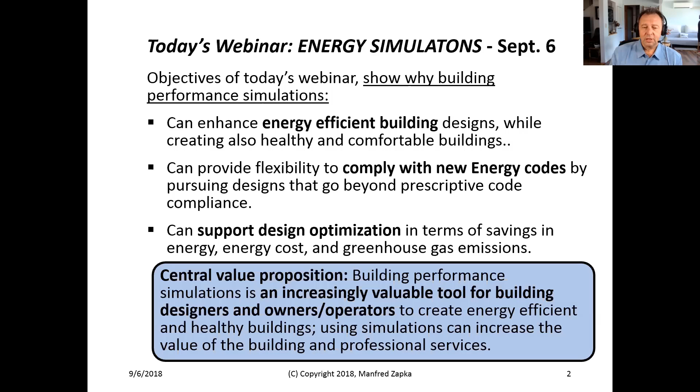Here in Hawaii, we have the IECC 2015, and this offers simulation as a pathway for compliance, and it affords the designer some kind of flexibility. So the overall central value proposition which we are going to show here is that building performance simulation is an increasingly valuable tool for building designers and operators, to create the energy efficient and healthy building which we use.

Let's see, I would just like to share my story of simulation, how I got into it. It was about over 20 years ago, where I started 3D animation simulation for plant design. This developed in a sense that I got very excited, and I was very excited lately working with ERDL and University of Hawaii on new kinds of application of this evolving field.

And the beauty in the simulation is that we can investigate alternatives of building design. We can optimize it even before we put any kind of money into constructing it. You will be seeing that the recent work of ERDL and university has used simulation to study various building design performance aspects, and energy performance will be one of the highlights here of our presentation.

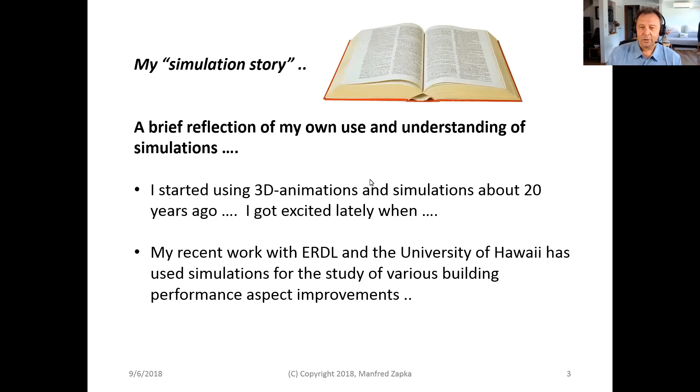Let's take a step back, because for people who have never done it, I hope that in the future this will help the local building industry get more accustomed to simulation. When you step back, simulation is not really foreign or new on the horizon—it can be found in virtually every sector of the industry. Here I will go through some examples.

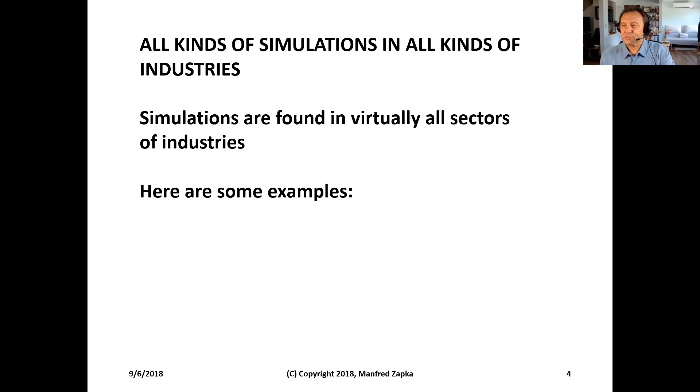On the left side, you see making cars more aerodynamic, reducing resistance to make them more energy efficient. You see training pilots without leaving the ground. This kind of simulation sometimes uses supercomputers—you need really heavy computing power.

We also see architectural rendering. Almost everybody knows this right now—it's common knowledge. But 20 years ago when I started, it was like, wow, you have something photorealistic you can put into a neighborhood. So this is also a kind of simulation, but much more visualizing.

Floodplain simulation is increasingly important right now. We see the effects of global warming and climate change causing different rain events, so we can predict where is actually a good place to put a house, or what things we have to mitigate in order to avoid flooding problems in the future—so we are better informed.

Next is airflow simulation. We have done that too—I'll show you afterwards, at the University of Hawaii, specifically around high-risers, where it has effects on the building itself or on pedestrian comfort and safety.

To the right of it, virtual reality application seems to be more the future, but it's increasingly used also for energy and building design, and we'll be looking out for this. So it's not totally in the future—we might be there pretty soon.

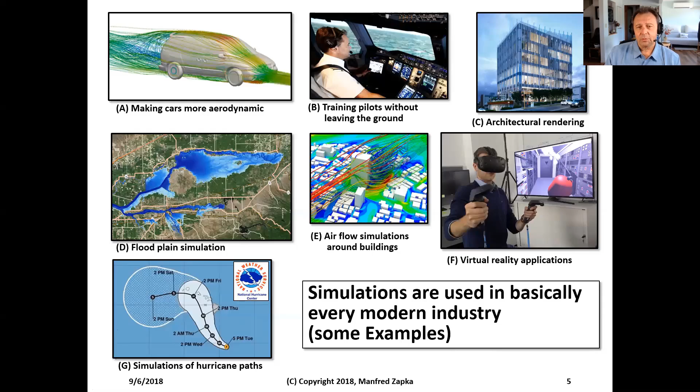So here are some important issues to keep in mind for simulation. We always have to remember that simulations are abstractions of the real world. A lot of times people get carried away and say whatever we get out of the simulation is the truth—but it's not.

We can make the simulation more or less complex with more comprehensive calculations, but in the end there is always simplification. Usually we only model specific performance behaviors, because our mathematical algorithm is pointing to a specific behavior of the system. So the numbers we create are only valid for that very specific conclusion, and simulation need not be complicated if we define the application very concisely.

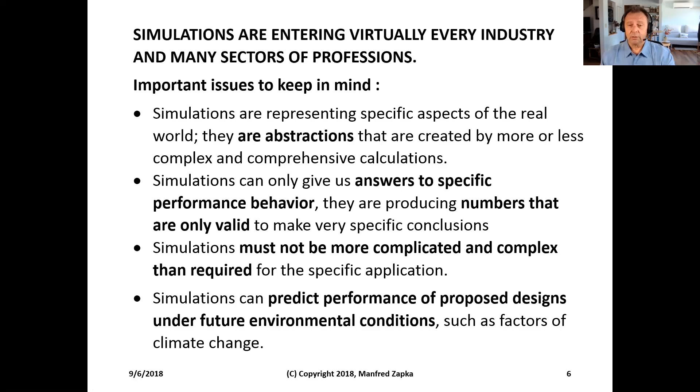One other thing I want to point out: simulation can predict the performance of proposed designs under future environmental conditions—for instance, climate change. We might have to model how buildings will perform in the future when it's getting hotter, when it's getting humid, or if there are big rain events, whether the floodplain is still okay and safe. So these are things we should keep in mind right away.

And we have many types of building performance simulations. [Sorry, I've got a little cold today.]

Starting on the left side, we have indoor comfort of a building. We have particles and pollutants, where we can simulate the spread inside and whether or not it is an issue for health. We can simulate sound by attaching certain material properties to surfaces and sound sources. And very important right now is moisture—in the air and in different building components. This is getting a lot of attention, since more energy efficient buildings are having moisture problems which are not getting smaller.

We can simulate airflow around and inside buildings, which we have done with HNEI here, and we can simulate lighting and daylighting in the sense of how daylighting can replace artificial lighting, which of course also creates a need for energy.

We can simulate thermal comfort, and right now we have energy, which we'll be concentrating on. Simulation is synonymous with modeling, so modeling or simulation is basically the same. What we create is an abstraction of the nature of the real world, and we package it in a way that we can calculate.

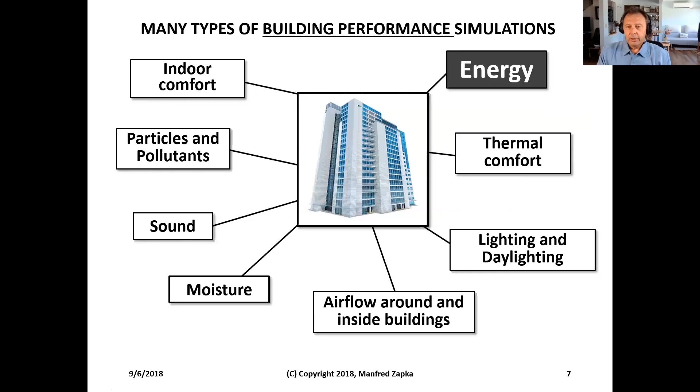Building performance simulation has a surprisingly broad range of existing and future applications. This is a very nice and exciting tool, and we hope our contribution here in Hawaii will help the industry embrace simulation in a better way.

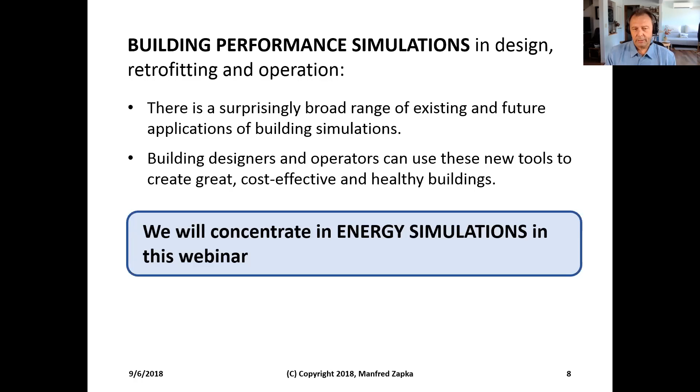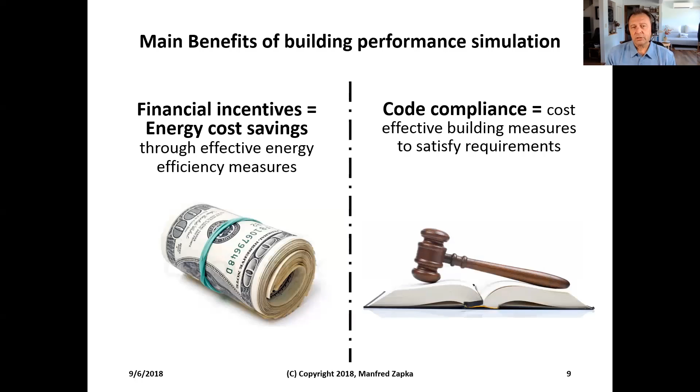The main benefits of building performance simulation, speaking about the energy part, are twofold: one is financial incentives, where we can save energy costs, and the other one is code compliance.

Looking at the financial incentives of energy simulations, the more energy cost we can save through identified or optimized alternatives through simulation, the more energy costs go down. We can try out multiple alternatives, tweaking the building here and there, until we reach the point of the most effective or biggest energy cost savings.

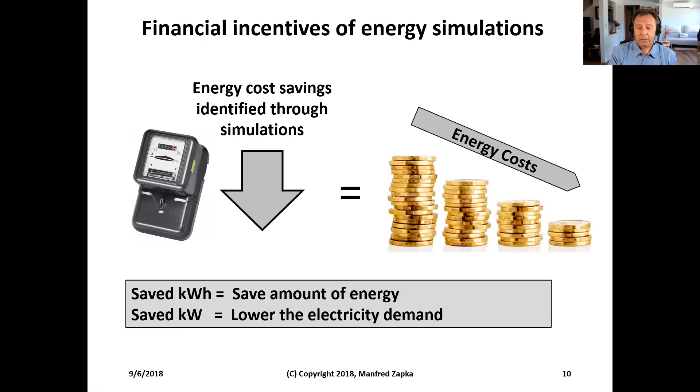The savings is measured in kilowatt hours, which is the energy, but we can also identify what kind of power we are using, in kilowatts. This is very important because we not only have problems providing energy and need to save, but we also need to save on peak energy demand.

Whenever we want to save energy, it requires investment and emphasis on energy efficiency measures. So starting from a simple, basic house design, we have to put money in to save energy, to get to a more green or energy efficient house. You cannot get anything for free, right? You have to pay in order to save.

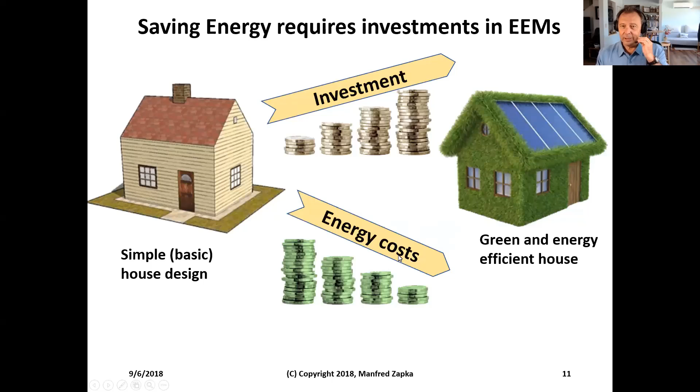I apologize, I have a little cough today. So if we look at what the energy efficient measures are here in a building, these are just some examples.

We can invest in roofs, or cool roofs as we call them. Here we configure the roofs so that the least amount of heat is absorbed by the building. It should just reflect the heat, and it should be able to emit heat, so it should stay cool. The term says it all - it's a cool roof, not cool because it's cool, but cool because it doesn't take in so much heat.

Wall insulation is similar, because here in Hawaii it's usually hot outside, and we would like to avoid heat penetrating to the inside. Wall insulation helps keep the heat out through the walls. What it does is not only cool down the inside walls, but if the inside walls are cooler, we don't have so much radiant heat - and that's what we feel when we get close to a hot object.

On the left side here, PV - an energy efficient measure not necessarily to save energy, but to create or generate energy onsite. This is one of the most amazing things we can use with a building, that we can create energy. We use the roof to cut down on energy demand, and we can create and offer some of the energy for use on site, so we don't have to take it off the grid.

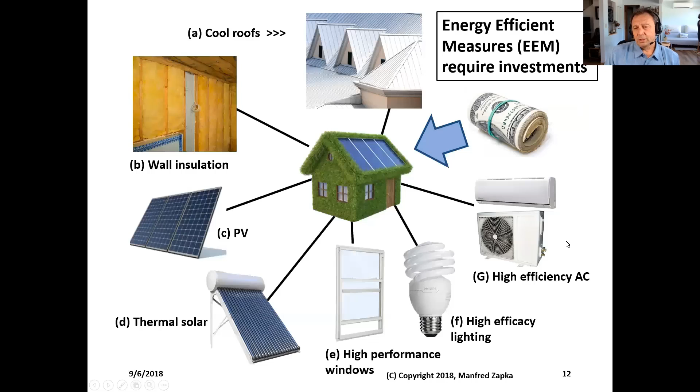Remember, we said we have to pay dollars in order to save energy. It's usually true that the most energy efficient and best equipment also costs money. So these are all examples of how we have to invest into issues so that we can actually save energy.

So the next question is, how do we assess the ROI of energy conservation? Right now we have simulated a couple of alternatives which save energy, and we have to see how much we have to invest in order to realize the energy savings.

We have two ways to identify this: simple payback and net present value. We won't go into net present value right now, but these are the two things. You have an initial investment, and due to energy savings you regain this investment, and afterwards you're cash positive. Simple payback should be used for shorter term return on investment, and the longer and larger the investment, you should use something like net present value. Again, we won't go into the details, but please keep this in mind.

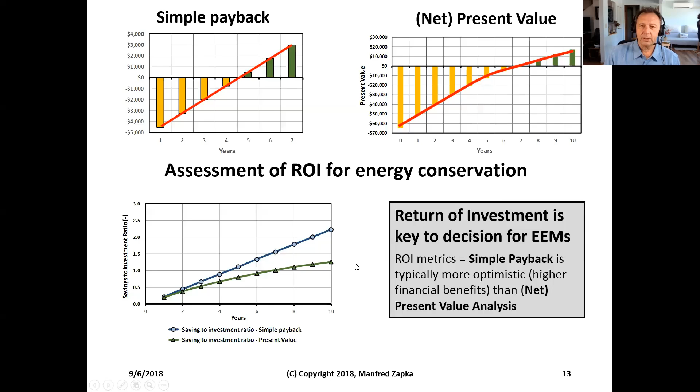Rule of thumb is that simple payback is almost always more optimistic than net present value. So when we decide on the financial performance, we always have to consider both: how much energy we can save, and how much investment is needed to realize those energy savings.

Building performance simulation is a very effective assessment tool. It's a very effective and good way to identify the most effective approach—just try out all these alternatives and see what is best in terms of the finances.

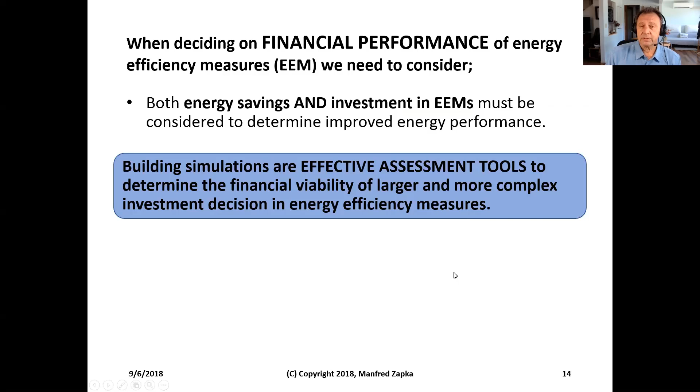There are also other benefits—we can comply with compliance standards, codes, and building standards like LEED. For instance, we get points if simulations show good energy efficiency, or as I said, the International Energy Conservation Code, which is to be adopted in Hawaii, offers compliance through simulation.

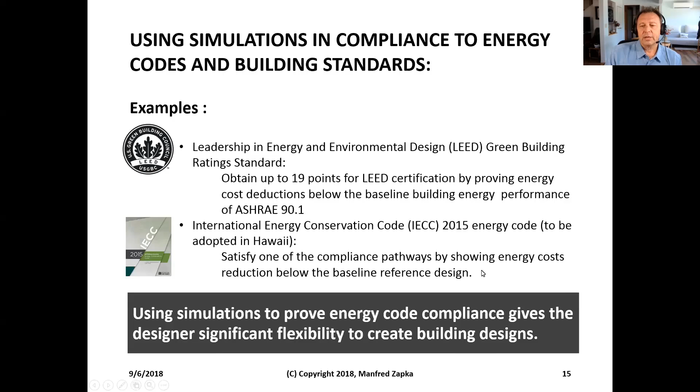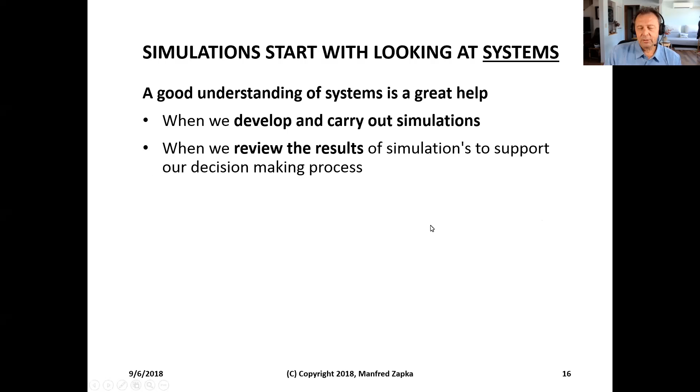Simulation always starts with systems, and a system is an abstraction of the real world. It's important to see both how you create the simulation and how you see the results. The modeling and simulation of a system is a calculation method using mathematical models to predict the performance of a system.

You have the real thing here, and there's some kind of mathematical algorithm that defines a prediction. The nice thing is we don't really have to know all the mathematical algorithms in order to use the simulation.

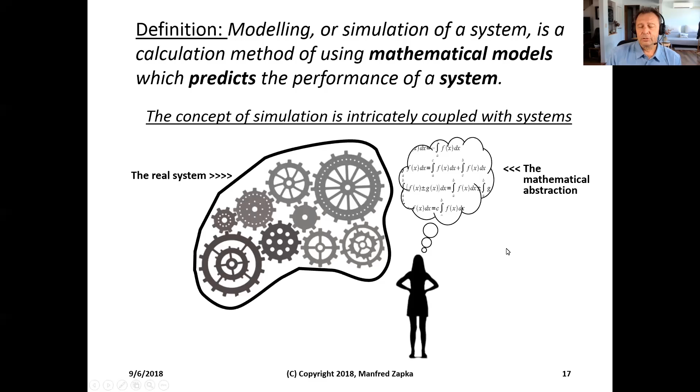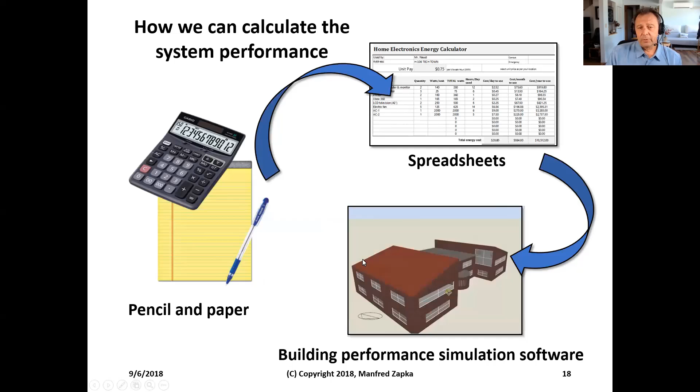How can we calculate the system performance, how can we quantify it? We can do it with pencil and paper when it's very simple, or with a spreadsheet, but the best would be some kind of building performance simulation software. That's actually what we're doing right now at ERDL, and what we'd like to do in future to also help the local building industry get more into.

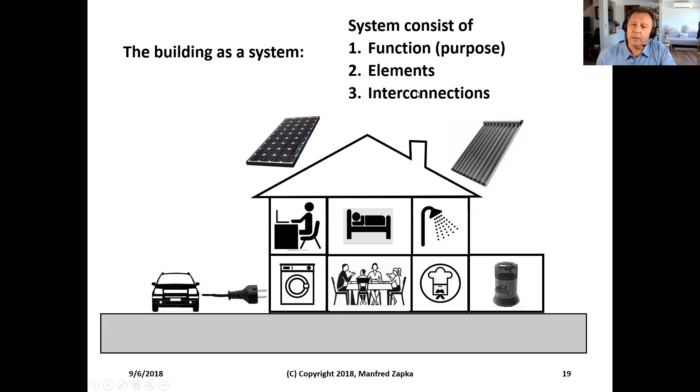Briefly, a system has three elements: function, elements, and interconnection. This is the house, and the function of the house is to provide healthy, safe, and cost-effective shelter and an uplifting place to live. We should always keep in mind that even if you make it very energy efficient, in the end the value of the house is that it is healthy, safe, and cost-effective.

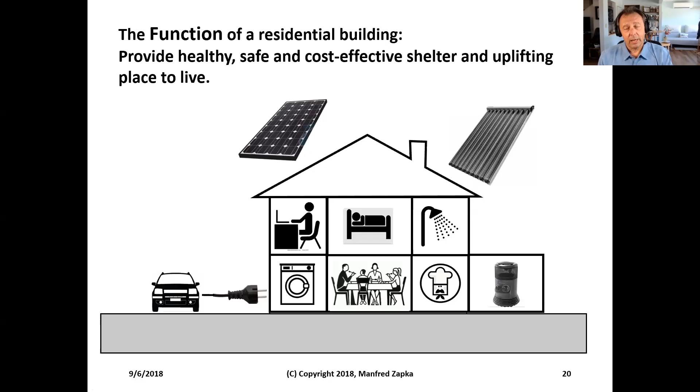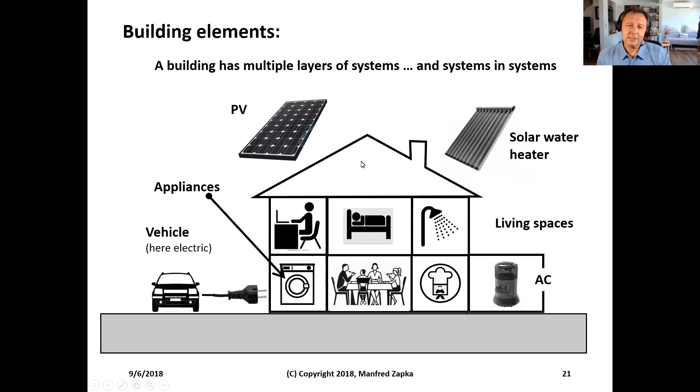A building has all kinds of elements: internal rooms, appliances. Here we have an electric vehicle, we have AC which is cooling the building, and different kinds of renewables. So these are all different systems, and we also have systems within systems.

The beauty is that in our energy model, we take it such that there is something like a boundary, and we can identify the quantitative measure of the system just by drawing a boundary around it. We don't necessarily have to know everything which goes on inside this system.

So what is the system here? For instance, an interconnect - where are the boundaries? The boundaries would be the red. The interconnection is that it has to get some kind of electricity, and the outside of the system is the grid. The inside is all the different components.

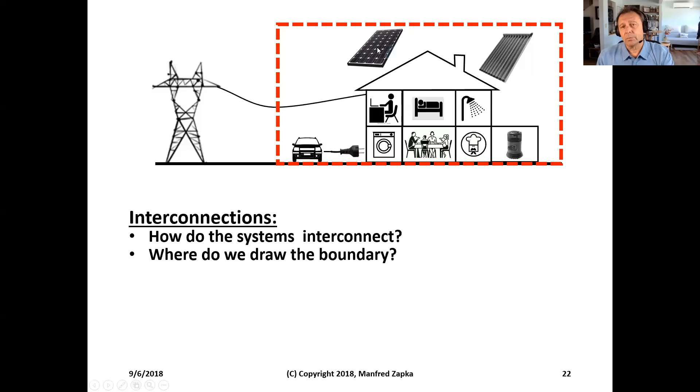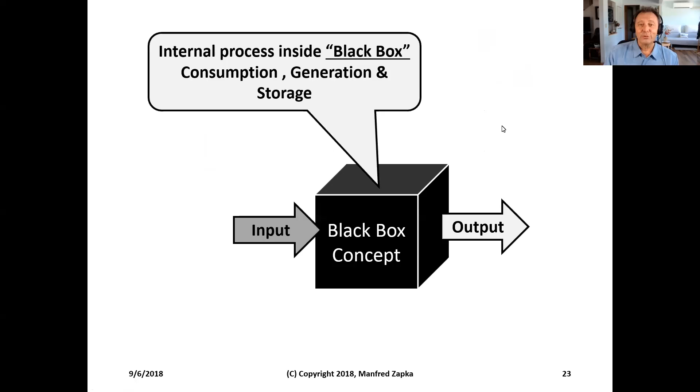Whereas here, for instance, the PV can even give electricity to us. So a lot of times we have like a black box, and this is fine - we can define the quantitative performance of the black box. We have an input, we have an output, and there's something going on inside that black box: consumption, generation, and storage.

Either we can total it all up and say this is actually whatever we consume inside, or we can identify different components of the system - what actually is what we are consuming here. And if we have surplus electric energy, we can also export some electricity to the grid. This will help us identify what is coming out of the simulation. We don't necessarily have to know all the intricacies inside of this thing.

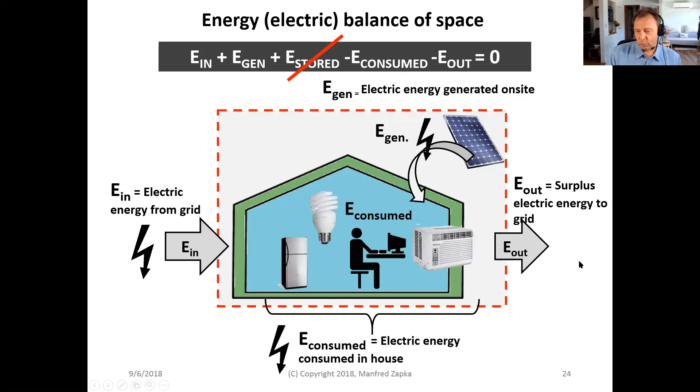We just say it's convenient - we have a boundary, what goes in, what goes out, what is consumed or generated inside. Our home, for instance, is very net energy - we create a lot of energy here at our home. So we would actually export electricity.

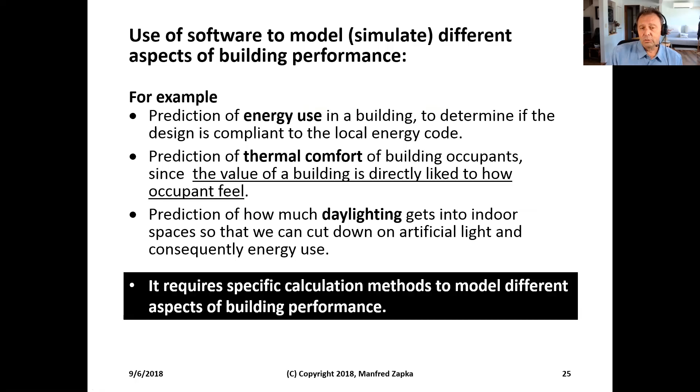So the use of software has different aspects - what I said, we have energy, we have thermal comfort, we have daylighting. There are different ways we can use to identify the performance, and all of them are important if we want to make sure that our system, which has a certain function, as we saw like the system of a house, creates a comfortable, energy efficient, or cost efficient way to be. It has to serve this purpose.

So if you compare building simulation with actual measurements, which is often done - we simulated one side, but at one point we also would like to know how does it compare to the actual reality. A lot of times we are surprised - hey, this thing does not exactly come out as the real world. We should always keep in mind that simulations are abstractions of the real world.

It's also important to see how much complexity our simulation has. You can use maybe very complex simulations - at ERDL, we took some simulations that ran a couple of days, but we could have something which is done in a minute. It's pau, or it's done - pau is what we say here in Hawaii.

But the power of the simulation is not necessarily only how it compares to the real world measurements, but how is the relative performance - we have a benchmark which we simulate, and then we have the different alternatives. It should really help us as designers to plan, and we should not shy away - we should embrace simulation more and more.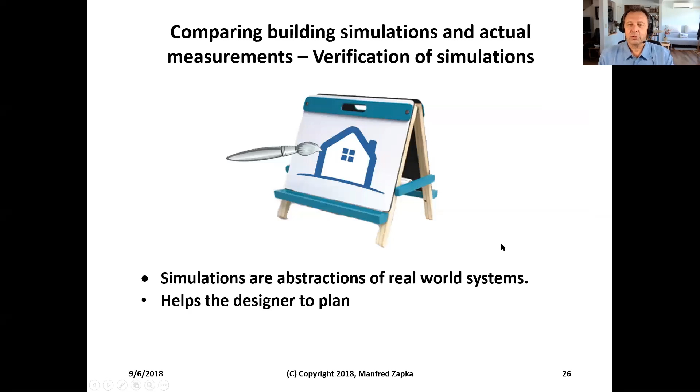Here are just some examples of what we would measure. Sometimes it makes a lot of sense to measure - we have electricity, and some other things we can measure: the temperature inside the building, humidity, air movement.

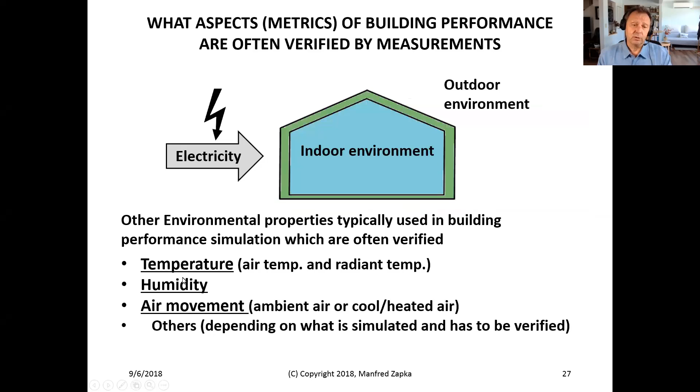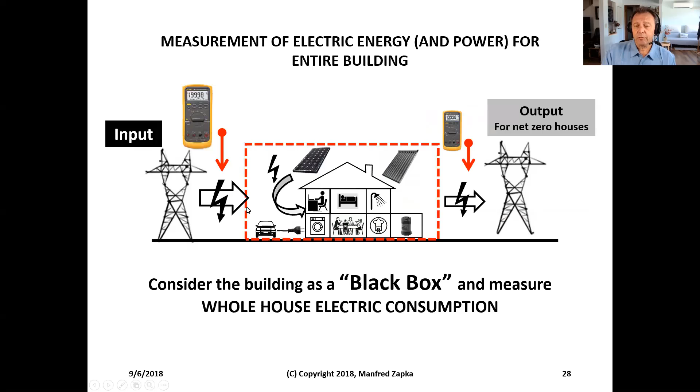What we can see here is a different way of getting to it. It's like the energy we would have, the big black box where we call the whole house electric consumption. Basically here we say, what does the whole house, the whole building actually consume? We have an input we can measure, and if we have PV we can also measure the output. But if we don't have PV, this would be our biggest result: how much energy is used for this entire building, using the black box model for the entire building.

The next one would be if we want to measure the electricity used by, or generated in terms of PV, for the different elements of the building. Here you see it could be the large appliances, the plug loads, how much the HVAC consumes for the building, and domestic hot water - how much we put in electricity to power all the pumps, but how much we actually save in order to heat up the water. How much do we have for lighting?

So here it's much more that we can go in there and see how our simulated results compare to the actual measurements. So we get a good idea where it's maybe a little bit shy. It doesn't really say that the simulation isn't doing well, but we should keep in mind there's certain abstraction to it and simplification. And the simplification makes a lot of sense if we actually know what kind of simplification we need or are using.

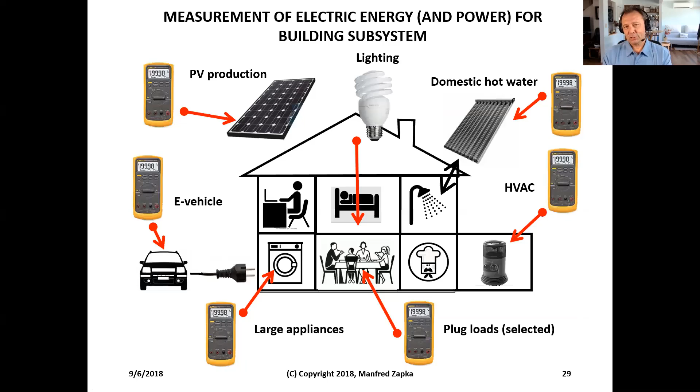So the measurements, again, like we said - sorry, let me give you a short example. What we also at ERDL do a lot of times is go in and measure.

We have the relative humidity, and we have a globe thermometer. A globe thermometer measures the mean radiant temperature - this means how much all the different surfaces in the building actually emanate. Because as we are in the building, we feel the heat coming from the radiant heat coming from all the surfaces, the internal air temperature, and the wind. These are the typical things we use in terms of the indoor environment.

There are other things like CO2, carbon dioxide, or VOCs, that we can also measure in order to identify the healthy issues of the building.

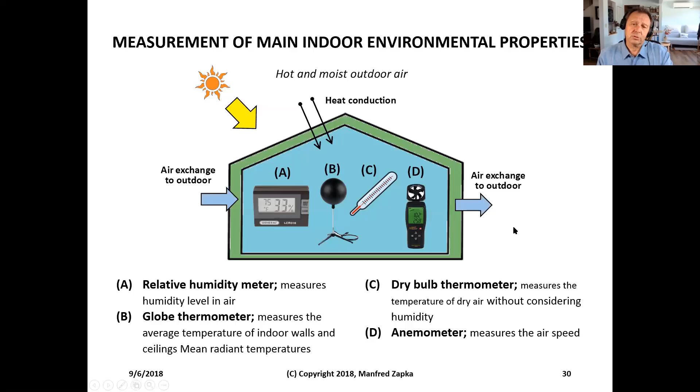So I just wanted to go right now and make it a little more realistic, and show you some applications which we have done here at ERDL in the last couple of years.

One of the things we have measured is external airflow investigation around naturally ventilated buildings, using CFD - computational fluid dynamics. This is a very exciting field, and a lot of people shy away because it sounds complicated. I agree, sometimes it can be very complicated, but it gives you good results if you are interested in airflow, in very specific properties inside of a room. Then you would use computational fluid dynamics.

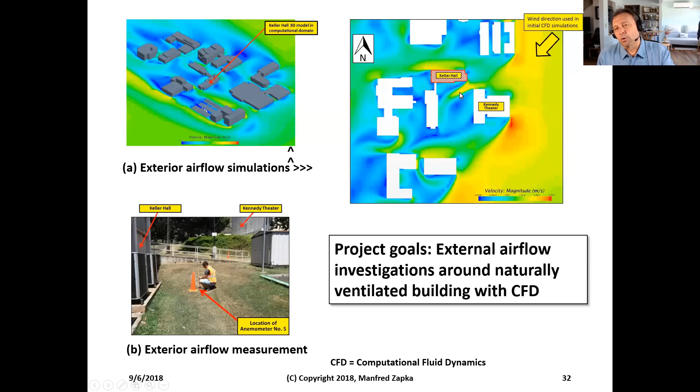Here in our field, on the left side, you see the Manoa campus. At this point in the project, we were investigating the airflow around Keller Hall. Here you see these different shades identify the magnitude of the wind movement - very red is very high wind, coming from up Valley Manoa and going around Kennedy Theater, toward Keller Hall. Between Keller Hall and Kennedy Theater here on the left side, we measured it and saw how good our prediction was.

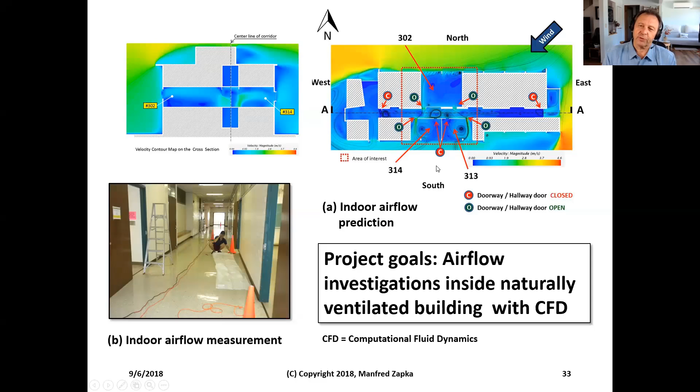This is an internal CFD where we identified the air movement through a building, and we checked how well we could predict it. This is very important because air movement through naturally ventilated buildings basically gives us cooling, gives us fresh air. And the next slide shows that not only did we do air movement, but we used CFD here to predict thermal comfort.

And you see here, this one on the left side, this is a model, but this is the 3D model which identified the computational domain. So whatever is inside of that domain actually is calculated. What is outside is not existing. The computer cannot see it.

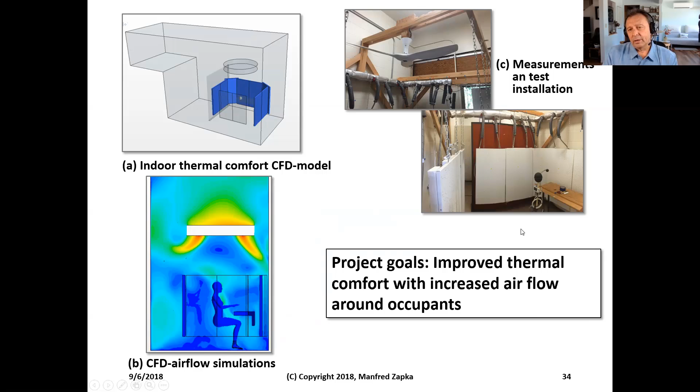The below is here like, this would be like a ceiling fan, the white thing. And here you see the different contours indicates how much airflow there is, because airflow over the body acts like a cooling mechanism. So this one was pretty interesting. And on the right side here, we saw the real test setup where we measured and tried to verify our results.

So the last one is here. This is an energy simulation for residential houses, which we've been doing at the University of Hawaii for quite some time right now. This is using a software called BEopt, and in our next webinar next week, we'll be going through a process of using this simulation, a basic energy simulation software, to show you how the generic process is.

And here you, for instance, up here you could see there's always like you make first a model. This is a geometric model, and then you get some kind of results. And you see here lower here, this would be a result. This shows you in overall how much energy you use, but it also shows differentiate about the different components inside. So here you get the whole house, but you get also an identifier of what is used.

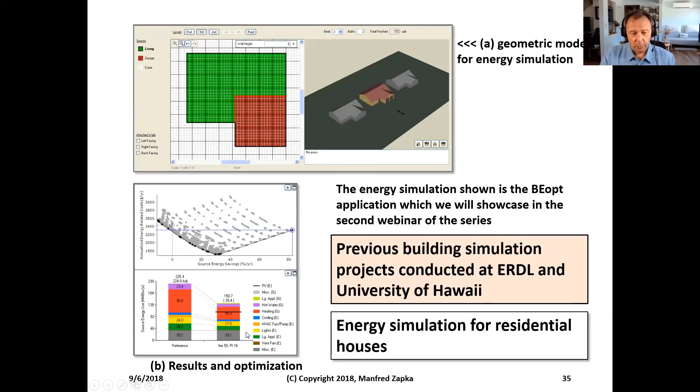And here, for instance, we have a reference case and we see some kind of alternative, the proposed design. In our case, we could significantly lower the energy use for our proposed design. So we were very successful.

So let me just go very quickly here what lies ahead of building performance simulation. And I would stipulate that it's really increasingly supporting design and operation of buildings. This can really increase your proficiency as a professional, not only as a design professional, but also if you want to operate a building. So it makes a lot of sense in order to get through it.

And the wonderful news is it's not getting relatively harder, but it's getting more intuitive. So the interface is getting more intuitive. The hardware and the software is getting more powerful. It doesn't store that much. Not like, for instance, sometimes, all the way back when I started, some things were going for a week, and all of a sudden the computer stops. Oh no, I have to start for another week or so.

And again, the new generation of building designers and professionals who are right now just in university or so, we hope that they are getting very, very well familiar with simulation tools. And so you will probably see a big shift in the industry as everybody is getting much more savvy of using these things, and also getting more intelligent in terms of using it.

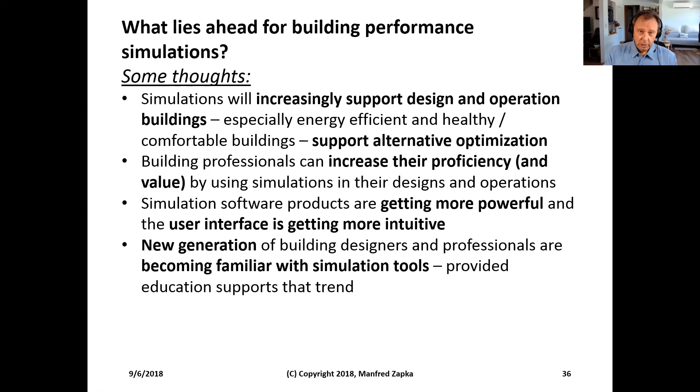So just what actually is, how has building performance simulation developed? It started all the way back in the 1950s. Here you see, like, this is a big computer. I think just the whole house was full of the computer. Right now we have a small iPad.

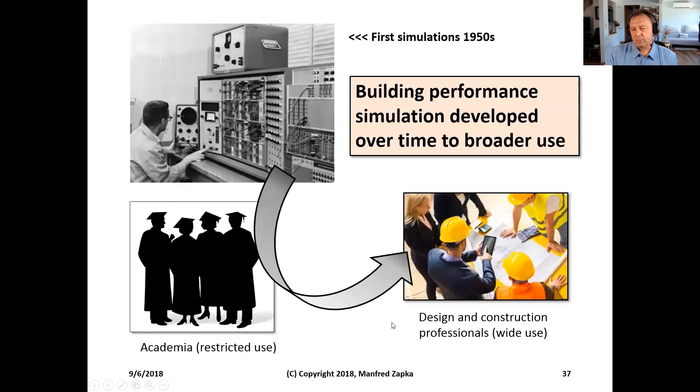But first it was like academia, it was restricted. But right now it's getting more and more to basic and wide use for design and construction professionals. And here's some areas which we think building performance simulation will play a bigger role in the future.

Well, of course, important for Hawaii, energy efficiency and conservation. And so we can do a lot in order to really come up with very high performance, high energy efficient buildings. And we can also see the energy code compliance, and we see that Howard Wiig is also on the call. He has been instrumental in pushing the new energy code forward for Hawaii. And we have there a code compliance path that, using simulation, offers much more flexibility to the designer to come up actually with new designs, and we are not so much limited to a prescriptive path.

But we always have to keep in mind, whatever we do in terms of energy efficiency, it is also important to have wellness, health, and comfort in a building, because the value to the owner, to the occupant of the building is very much in terms of how the building conforms to indoor air quality.

So we have indoor air quality, we have humidity problems, we have thermal comfort, we have daylighting. So these are all different things which help very much in terms of having wellness, health, and comfort in a building.

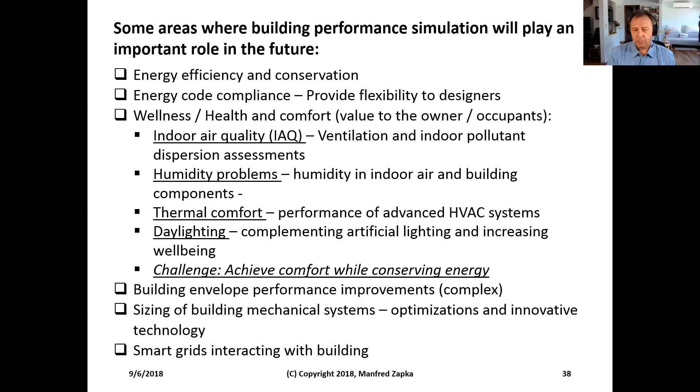And there are many more, but I'll just mention one more: smart grids interacting with buildings. This is actually very important in the future, as we have more and more distributed energy and smart grids in order to keep the grid stable.

There are two kinds of simulation software we're actually looking at. One is integrated building performance software, where we first create a geometric model, and we can then simulate and get ideas about energy, daylighting, heat transfer, thermal, and airflow.

And on the other side, we have standalone building performance software, where we have dedicated software for any kind of that specific analysis.

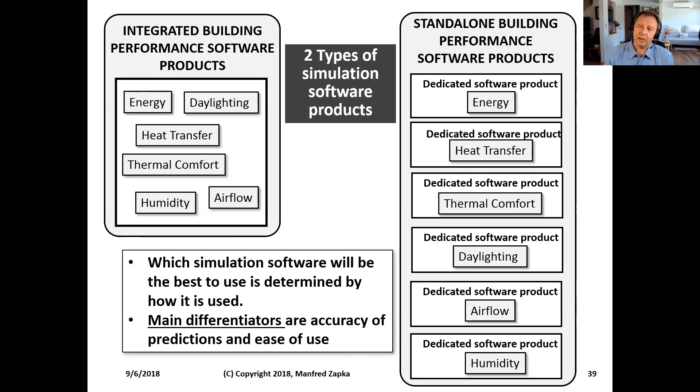The advantage here is that we have one model, so it's relatively easy to do. Once we have the model, on the other side, we might actually have to model multiple times if we cannot create that geometrical model of the building in one tool. So the main differentiator is either accuracy, which is better in the standalone and dedicated software, or ease of use, which is the integrated approach.

I'm closing right now with one message, which I've also learned by working with people in the simulation field: don't take the simulation as the real world, as if whatever comes out is like the gospel. We always have to keep in mind the simulation is an abstraction of the real building, of the real situation. So whenever we look at a simulation, we should also have some idea how the building would actually react without the simulation.

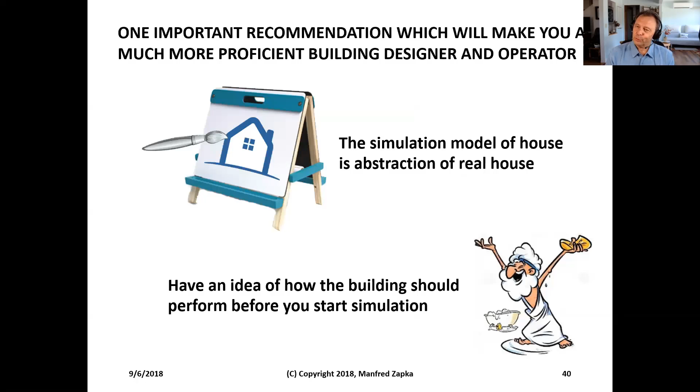First, get some kind of what we call the building story, like the building energy story. We can already identify, predict, or have an idea beforehand what direction the building should go, and then we use the simulation to really quantify how good our assumption actually is.

So, to summarize very quickly: right now we stipulate that simulation of building performance plays an increasingly important role in building design, operation, and code compliance. So it is actually important for us to go there as professionals—it will help us become more valuable professionals.

Modern simulation tools are very effective and getting easier to use. We can use very powerful interfaces to build even complex models. There has been very in-depth calculation, and a lot of these algorithms, which are sometimes sophisticated, have been validated.

The third point is not only about simulation, but also tells you that you should step back and not always use simulation for everything. It always pays to have a good understanding of building physics and the ability to develop a hypothesis—that's what I think the building will do.

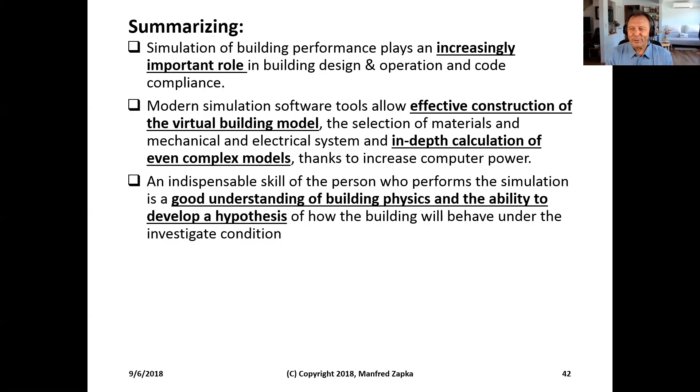And that's actually what we're doing at ERDL. We are not only trying to teach how to simulate, but also what is behind it. I think it makes everybody who uses and interprets simulation a better simulator—well, not quite right, we are not the simulators, we are people who are using the simulators.